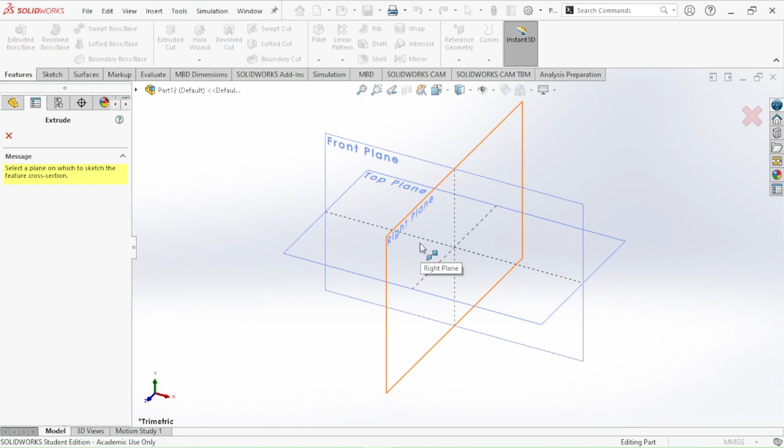Let's look at the geometry. There are a number of ways for constructing this. I can either draw whole geometry or draw only half and then mirror it. Let's mirror it so that I can show you another technique as well. So let's start with a circle. Whenever you have this sort of part, you could start with a circle so that you have got that dimension, the center as the origin.

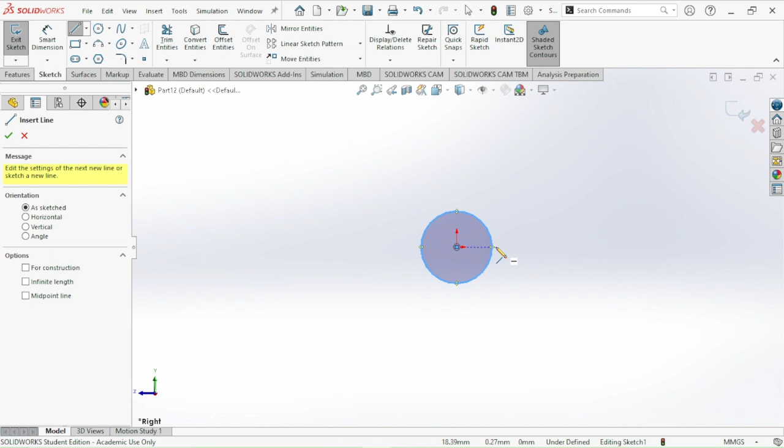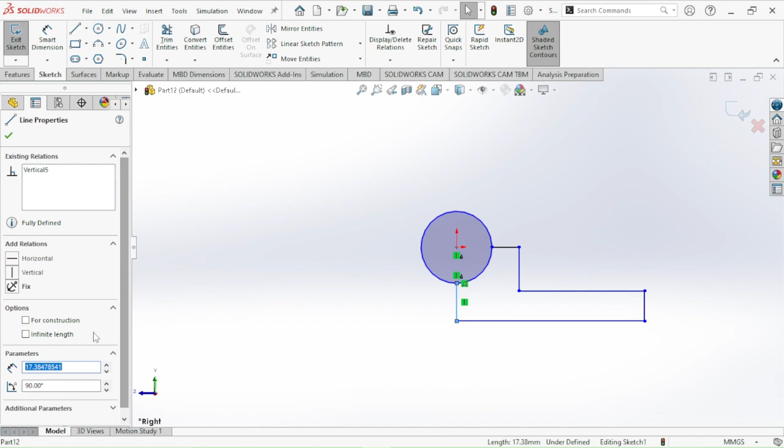And then let's draw this profile, draw it this way, and then down further. I think this is the shape that we are looking at. Okay, right. So let's try this. This is going to be a center line. I will simply select the line, because this is how I'm going to mirror. And can you see this construction? For construction, select the check box, and that simply changes to the construction line.

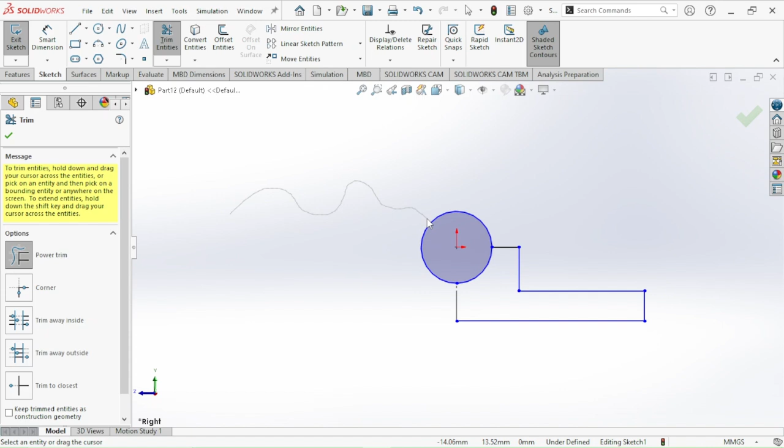Let's use trim and trim tool. This is first time I'm showing, so you select the trim, and then keep on power trim, and you see, can you see this line dragging, right? So as the mouse cursor goes to cut, it trims out. Okay, this is how you use it.

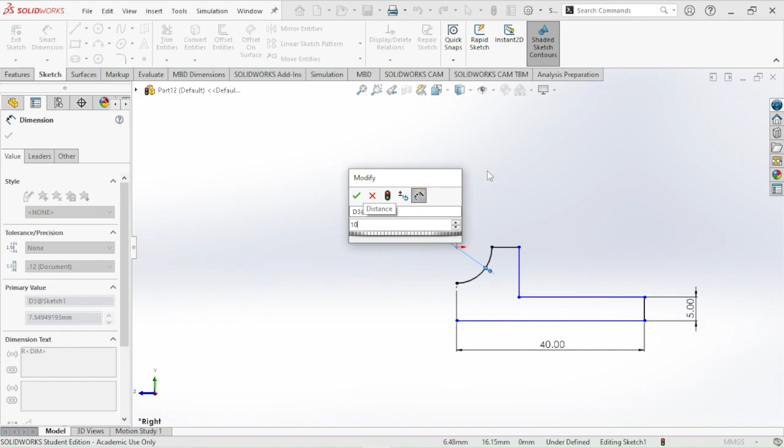Okay, let's add some dimensions. So that's 80 millimeter, so it's going to be half, which is 40. So I will start with 40 millimeter. All the sizes will be readjusted automatically. That is 5, and that's 20 diameter. So this is 5 height, and the diameter of the whole circle is 20. That means the radius is going to be 10. Okay, so 10 is the radius.

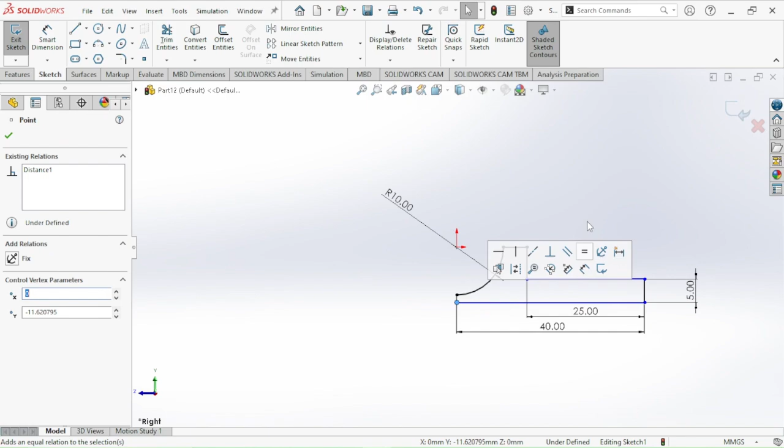And now let's look at the other dimension. This is 25, as we can see. So I will dimension it as 25. And now one thing that I would like to check, because still our part is not fully defined, and therefore let's look at where the issue is. Okay, so here we could see that there is a height. So if this is 20, that's 5. Let's look at the size.

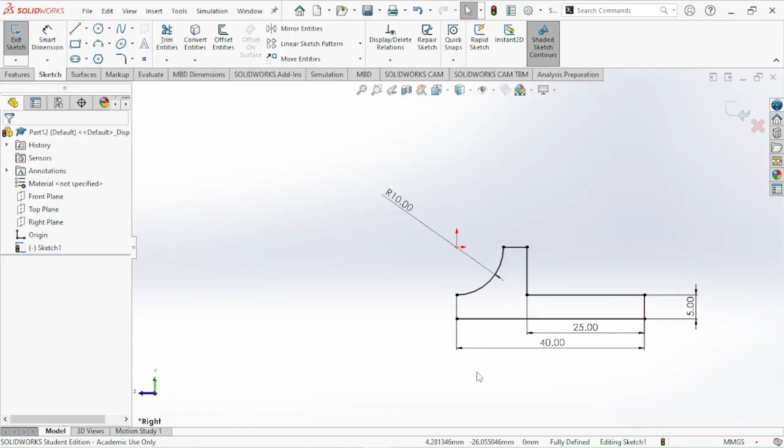So this one and this one, sorry, this one and this one. See, I'm selecting 2 points, so I'm making it vertical, or sorry, horizontal. Make it horizontal, and the part is fully defined, as you can see, right? That's fully defined, and now we can highlight all of it.

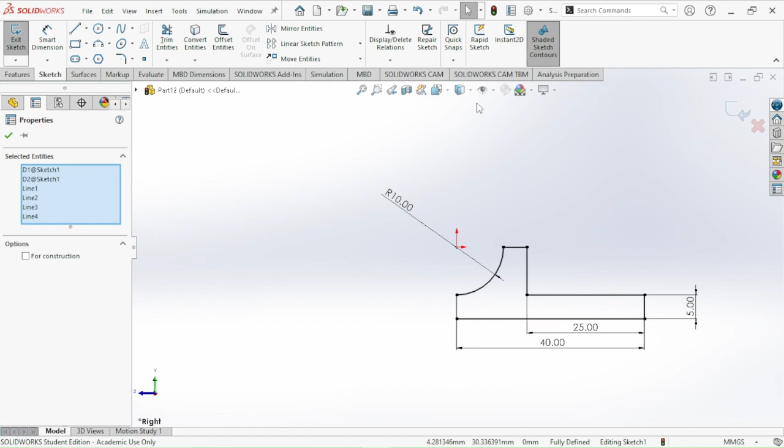Okay, highlighting. If I highlight from here to there, look, the circle will not be selected. Why? Because only half of the circle is covered, and this line as well. So if you go from top to bottom, you have to select the whole geometry in order to get selected. But if I go from bottom to top, whatever comes halfway through, slight part of it, it will come into

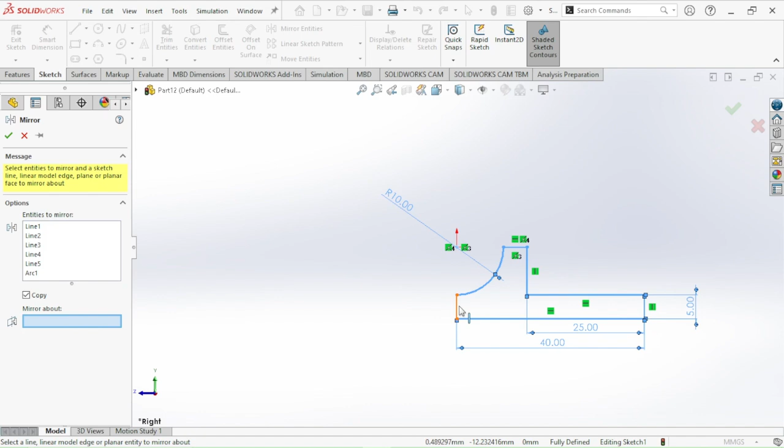fully selected area. So now select all the geometry, select mirror, and now mirror about is going to be your center line or construction line that you selected, and click OK. The part is ready. Now I can see that it's not fully defined, so we will have to check first of all where the problem is. This is a good exercise that it's allowing to see

where the problem is. So again, we can select this point and make it horizontal. Okay, so that's the horizontal relation. In fact, this one and this one, make it coincident and click OK. Right. So what I have done here is when I made this point and this point horizontally aligned, it detached from the circle point, the center point, while it should be attached to it.

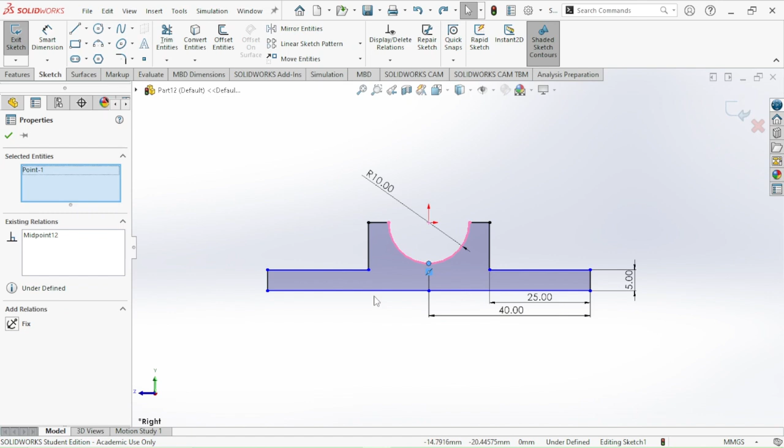So I would simply go back and highlight both of the points. As you can see, I have highlighted this point and I have pressed Control and held it and then selected the midpoint of the circle, and I would say coincident, so that it merged, and we can see the model is fully defined as it is shown here.

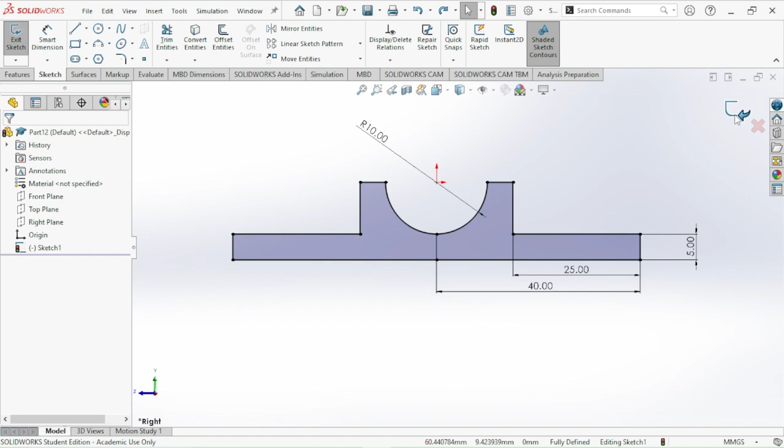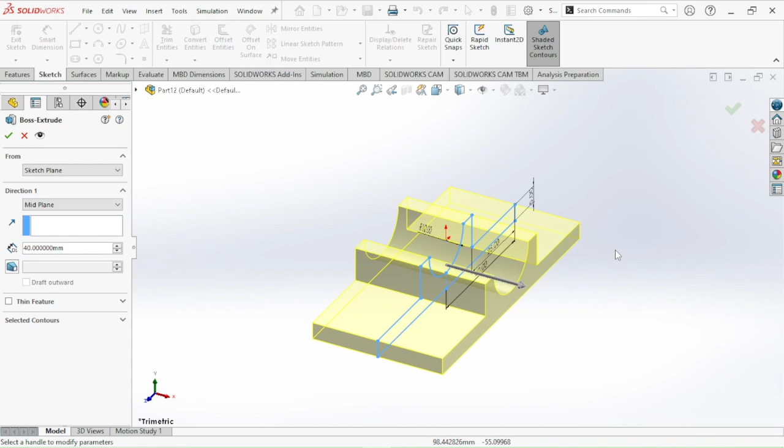Exit the sketch and let's extrude it. Extrusion is 40 millimeter, so I would simply enter 40. This time I want to keep it Mid Plane, here mid plane, so that it's in the middle, and I would select okay. So the part is nearly ready. Now we need these holes to be done, which is 10 millimeter diameter, which is somewhere in the center.

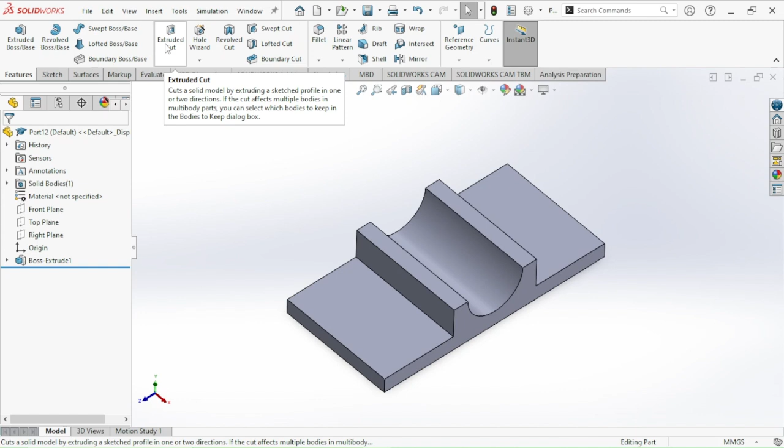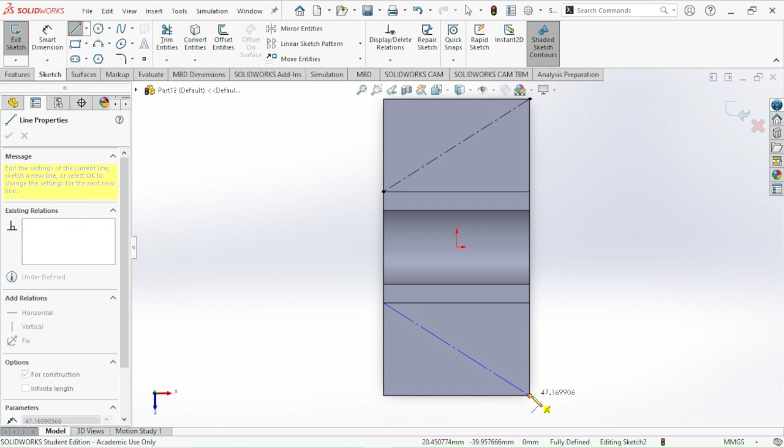So select extrude cut. Now look, all the other features are active. So I will simply select extrude cut. I would select this face and draw a construction line. So center line from here to there, so that we can put a circle in the center for the extrude cut. Select this end point to end point, and escape, and let's put circles on the midpoint. So that's one circle, that's another circle.

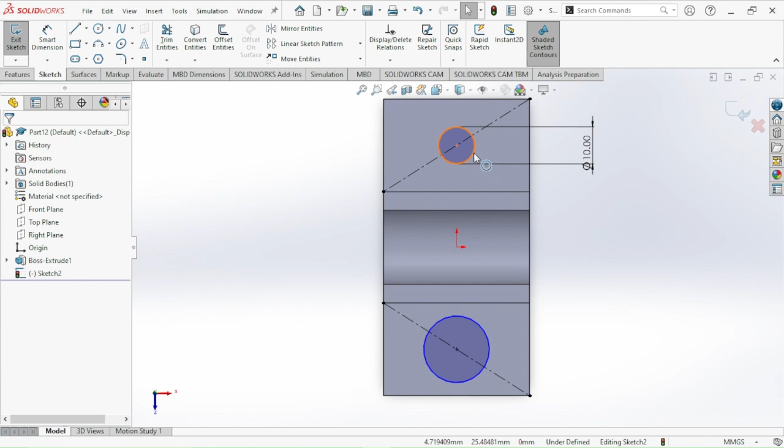Let's add the dimensions. We said it's going to be 10 millimeter, enter 10, and second one you don't need to dimension because we are going to add the relation. So select the circle, press Control and hold, and select the other circle, and the relation is going to be equal. So you select the equal here and click OK.

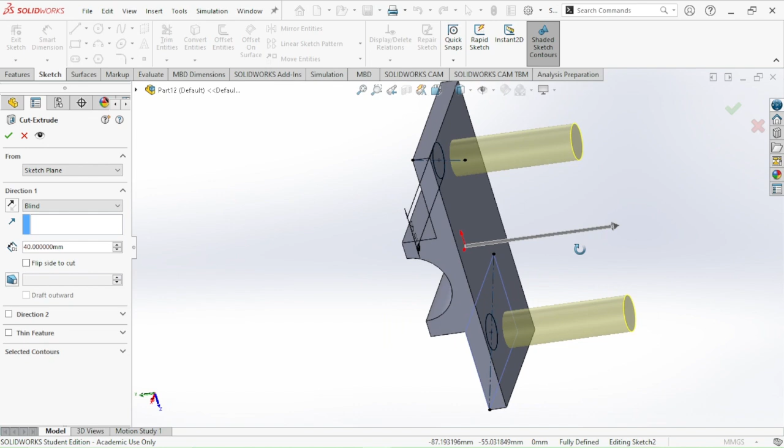You're ready. Exit the sketch, and you need to have up to next, which will go up to the next surface, face, and click OK. And that's our part ready. So let's put on isometric view and click somewhere outside, and that component is ready.